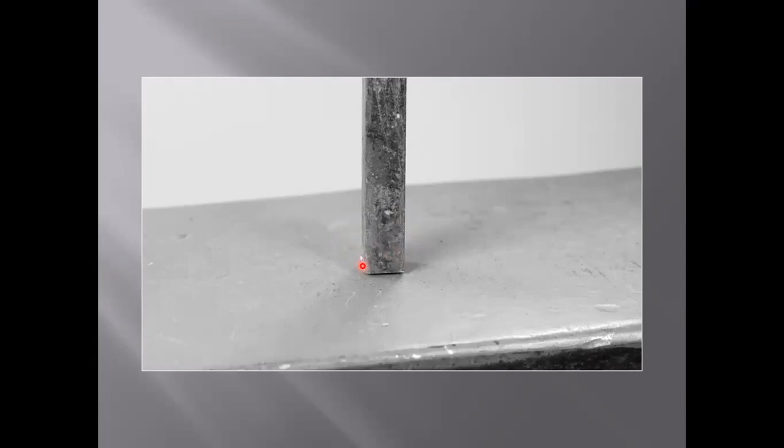We're going to take a 3/8 square bar, heated back no more than 3/4 of an inch to thicken this by upsetting it. So to get that short heat, that's the only time you can dip your piece down into your coal forge and get that nice short heat.

Place the heated side on the anvil, and you're going to hit from up here to fatten that end up. Now, as you do that, it's going to bend. And if you don't immediately correct the bend, it's going to bend more. And we want a straight piece when you're done.

So make sure that you straighten that as you upset it. It might take more than one heat. That's okay. Just keep that heat localized to that inch, 3/4 of an inch, and thicken it all the way around. I like to turn this every time I hit it, and I think that helps me keep a more even upset. And then once you're happy with the thickness, start angling the piece towards your hammer hand, in this case towards right-handed hammering, and start to put your taper on there.

I told you I was going to tell you a couple ways to get that. Might as well just get that taper started right here. Now all you need to do is bring this side back to parent stock width, and then continue to narrow that toe so that you can get started on your scarf.

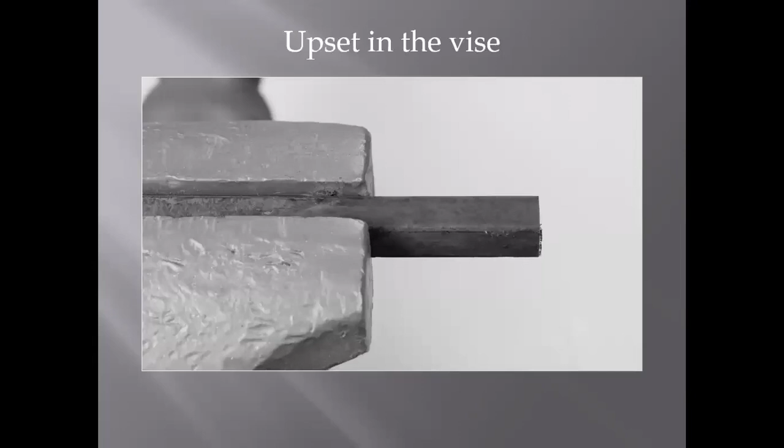If you don't want to upset it at the anvil, you can upset it at the vise, but you're going to need to think ahead as you hit this here to upset it, and it still should be a short heat. It's not as concerning because you're going to put it in this heat sink called the post vise, but a short heat is still warranted.

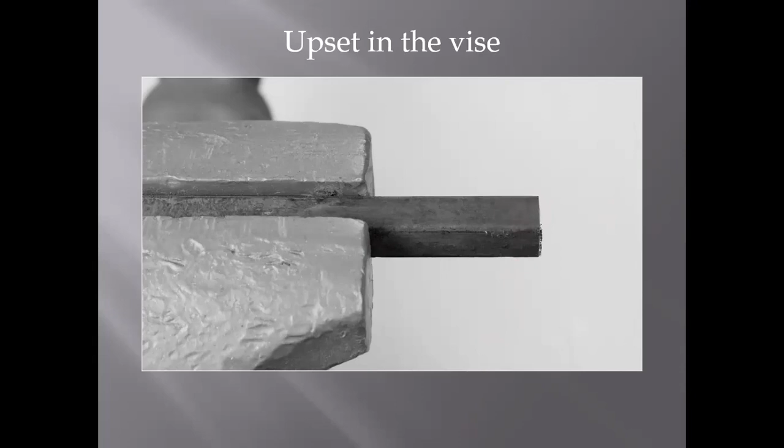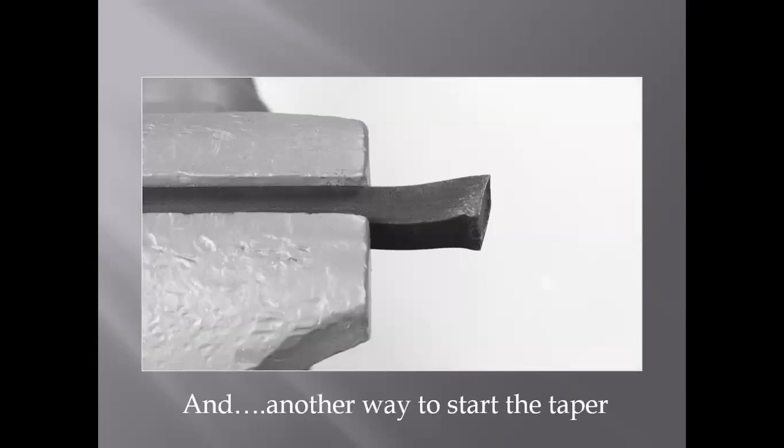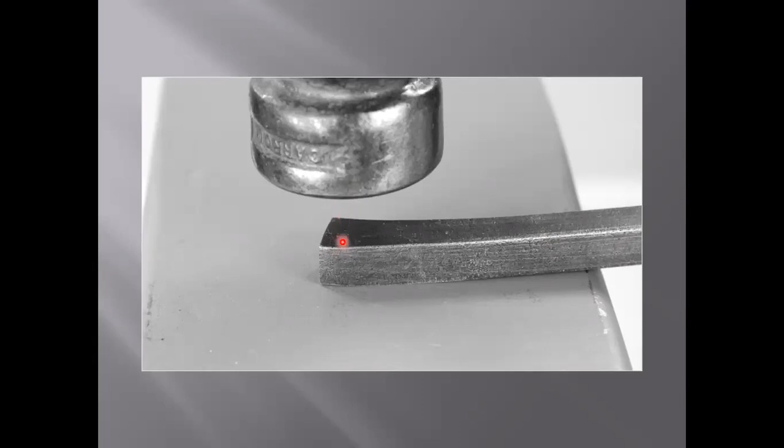You're going to hit here, and as you hit here, this is going to pull towards you. So start with it bent away, and then as you hit it, it'll straighten out, it'll upset, and then if you angle your hammer blows a bit, you can again get that taper started with a couple of angled hammer blows. Bring that piece back to its parent stock width, which will also give you a little extra material long-wise here, which will ultimately be your top and bottom. And a little extra material there is going to be helpful when you get to blending this weld in place.

You're ready to taper in your toe, make your 3-sided taper, set your indices. And again, this taper is too steep right now, but don't worry about that. You're going to hit it right on top. Notice how it's lining up with this apex here over a rounded edge so as to not make a shearing plane. Hit it on top, follow this down, drop this hand, allow this curve to happen, and you'll end up with an appropriate shallowness to your taper.

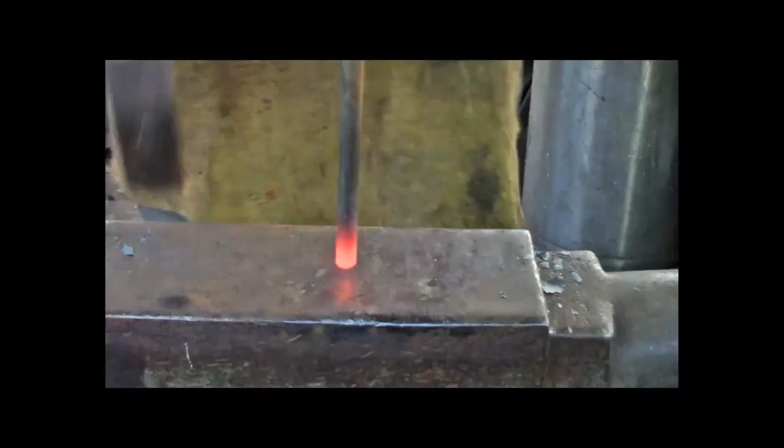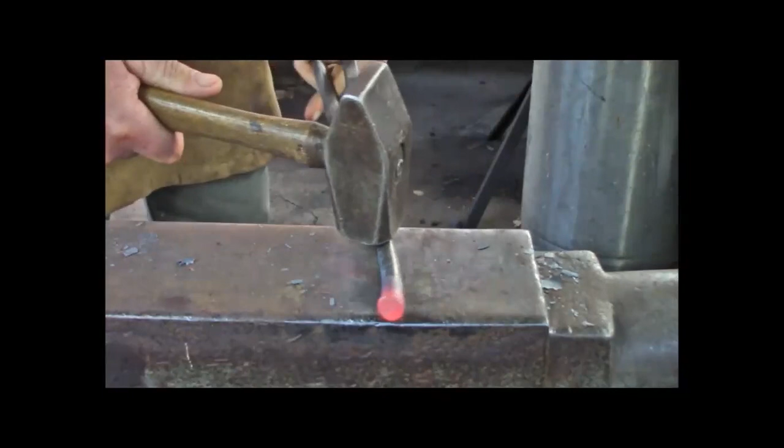So let's watch that happen. Bringing it up off the anvil does preserve the heat. And once you're happy with the thickness, angle that, bring it back to parent stock width on both sides.

And now you can bring in those toes, set your indices. You've seen it. It can happen on the edge of the anvil or on a block. And then follow that taper down to make sure it is a pretty shallow angle. You might need to knock in those sides, because remember, we're trying to check that so that when we hit it, it doesn't grow out past the one on the bottom. So there you are. You got your little scarf all ready to go.

Now I'm ready to teach you juggling, because really that's all a drop tong weld is. We're moving a little out of our comfort zone here of forge welding when everything's all nice and tidy together. But instead, we got to line everything up and get it all positioned in time to hit it, in time to weld it. So how do we do that?

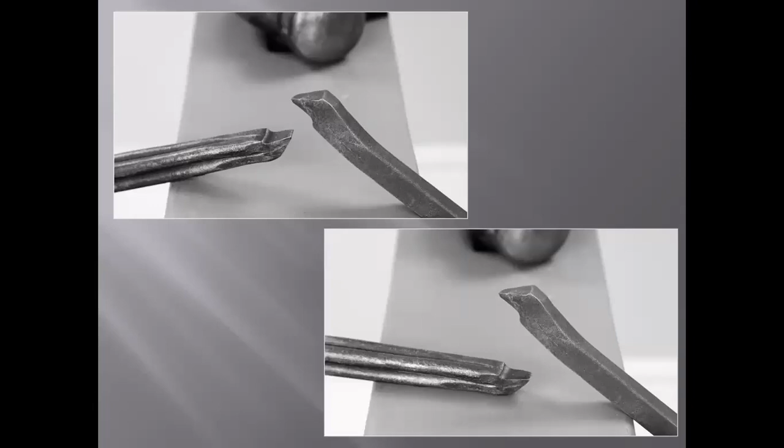Both pieces are yellow hot. They've been brushed, fluxed, and reheated. Note that the hammer is ready to go. It's sitting here ready for the smith to grab that easily. And it's even facing the direction that they want it to be.

The hammer hand is holding on to the short piece and it's reaching over the anvil with the tongs and anchoring that on the side of the anvil.

I've seen people try to line these up just in the air, and it's pretty much impossible. You waste a lot of time fiddling around trying to get those to match up. So anchoring them gives you a stable fulcrum to first set this piece down, and you still got your tongs over here.

This is your hammer hand over here. Then you've got your material held, your long shaft in your material hand anchored here. You're now able to line that up right so that those two indices match up. The better this fit, the sooner you're welding.

If this didn't fit well, your first blow or two is going to be getting those lined up. And when we're forge welding, seconds count. So this might be the other secret of forge welding: having a good fit saves you time and will get you welding faster.

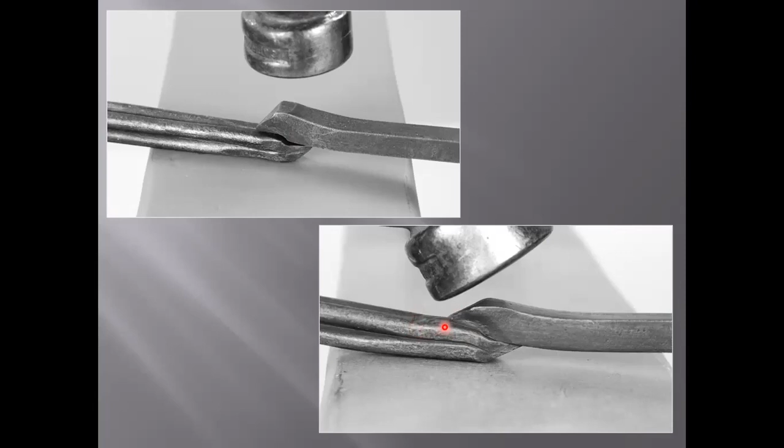So we've got all our pieces positioned, hit on top. You should see some debris and other nonsense. Drive the flux on out of the middle of that. And then you're going to angle your hammer, follow and blend in this toe. You can already see some hammer blows impacting the width of this, possibly.

So that's why it's good to start thicker, or thicken it like we did with this shaft. If you still have welding heat and everything still looks wet, the crust is not encroaching on your welding area, you can turn it over.

Notice that the basket handle is now on top. Same maneuver, hit on top, but spend most of your time blending in this toe. As soon as this gets crusty, you need to stop and reheat it. Don't even try to start forging this.

Notice that this hammer blow was such that the weld took place at the atomic level down here, a gentle introduction, and your scarves are pretty much intact at this point. That's how it should look when you first stick this.

Now, sometimes when you get started doing this, this might have bent out to the side and be a little crooked. Don't worry about that either. If you can get your weld to stick, you can forge it straight again.

So I find that I have to heat it at least 3 times before I'm brave enough to start forging. But once your weld is stuck, brush it, flux it, right back in the fire, back up to welding temperature, re-stick it both sides, brush it, flux it, right back in the fire, and then you can start forging.

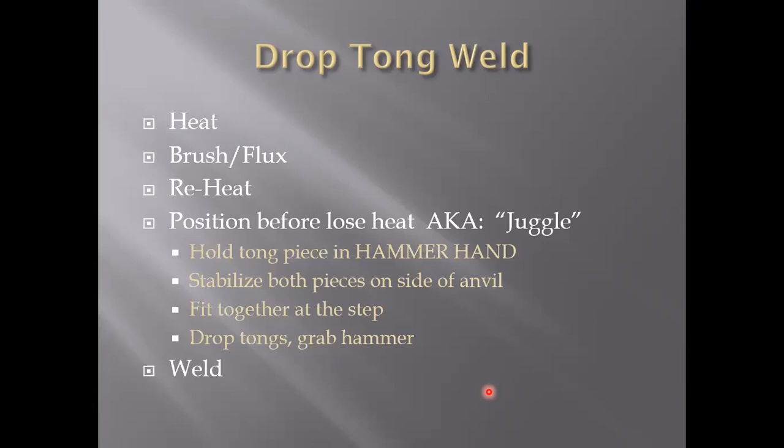As I said before, this is only going to cause something else to go wrong. Something's going to fall on the floor, or your piece is going to fall on the floor. I have picked up a piece off the floor while it was still welding temperature and welded it, but I don't recommend that as general practice. So practice this cold. If you practice cold, you'll notice how well your pieces are fitting up, and you can correct that before you go to weld. It'll give you confidence in your new juggling act, and you'll be able to move calmly and confidently, saving the time you need to perform this maneuver.

So let's watch a little video of that.

Hammer hand has the tongs on the far side of the anvil. Line that up on the bottom, using the anvil as a fulcrum. Place that on top, hit the top, follow that toe down, turn it over. We still got a great welding heat here. Most of the time is spent trying to blend in that toe. As soon as that crust forms, reheat it and then continue on with your blending welding.

Make sure you can see Mark here going for his brush. You want to brush this thoroughly at this point, because that flux can leave a little hard scale on there that'll be annoying to get off later.

Note here, this is just a still of what we just watched, that both pieces are super wet looking. They're the same color. That's how you want it to look. The cooler areas are where you're seeing this crust form. That's your marker. As soon as that crust comes up here, stop what you're doing and reheat.

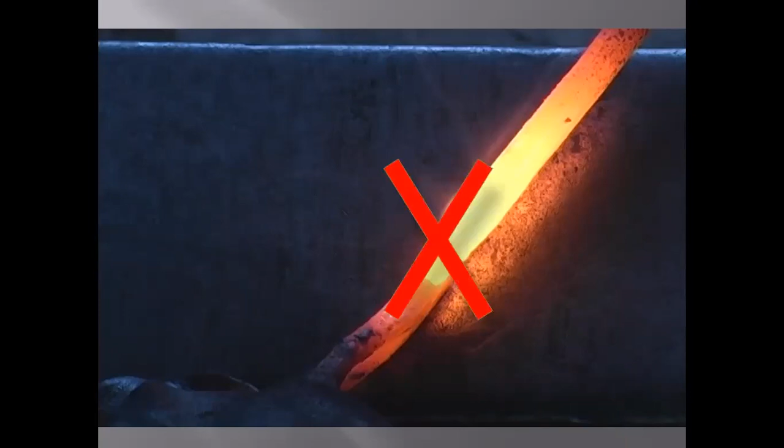This weld actually stuck, but then fell apart. You can see right here, this is not the same temperature as this. They both look a little wet, but they're not the same temperature. That is not going to stick. So make sure both pieces are heated the same color and the same wetness. And it's a nice long heat too, so you have time for this to cool.

You might end up seeing this too, where the part that was subjected to this heat sink we call an anvil got a little cold, but everything else around it is still welding temperature. Just give that a second, but you could still be welding this bit that is the right temperature.

So all of this was done on a coal forge. Let's look at an option for a propane forge. In a propane forge, scale is your enemy, time is your enemy, even if you use flux. So an option is to rivet it together

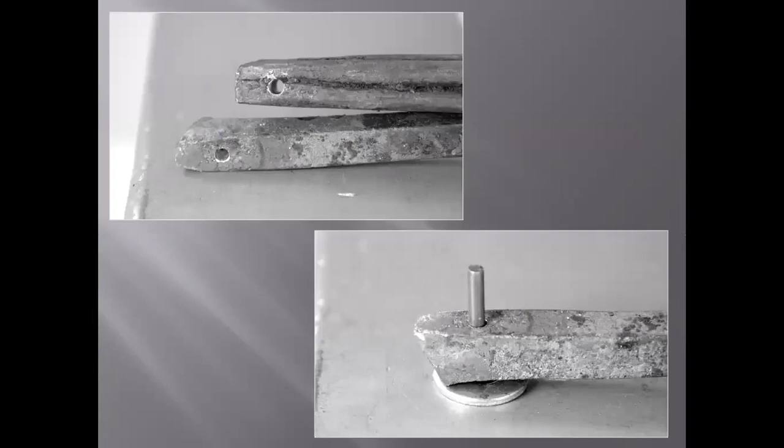and get it positioned together so that you're not having to do the juggling. Now, if you're having trouble juggling, this is also an option for you. There's no problem in doing this, it's just going to take a little more time. You got to drill the holes and set the rivet. Notice that there's no indices because there's no reason we're going to be lining anything up. We're going to be riveting them together. The washer leaves a little stick out on the other side so that you can rivet that other side.

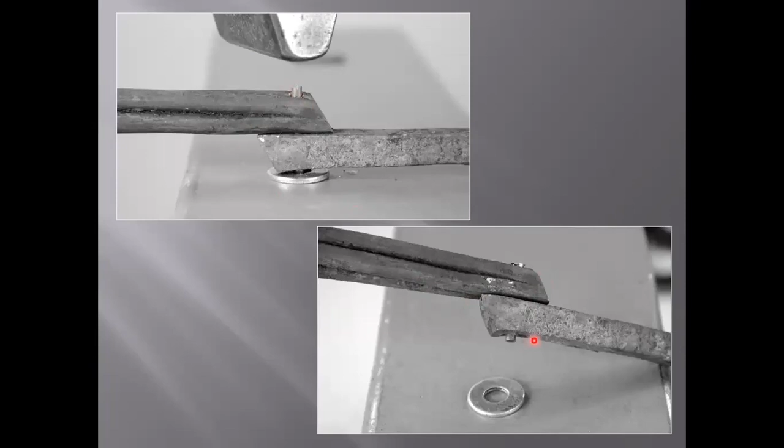So just rivet over this edge, turn it over, rivet over the other edge, and then heat this up to welding temperature. Same steps though: brush, flux, weld, brush, flux, reheat, weld, and then blend in your piece. So let's watch that happen here.

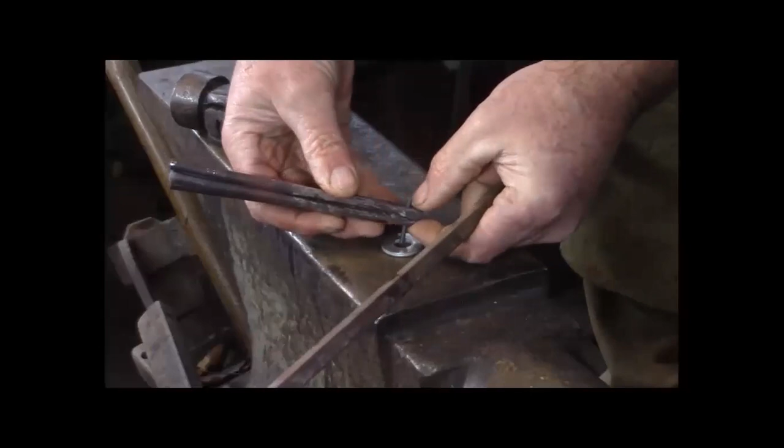So just setting in the rivet, nothing fancy. Turn it around, keep everything in nice alignment, set that rivet on the other side. Notice this is cold, all done cold. It's a 1/8 inch rivet size here, so cold is fine. It'll head over easily. Then it's just a matter of welding per usual, making sure everything is at a welding heat as you work. Brush off all that extra scale, reheat when you lose your heat, and finish off your taper.

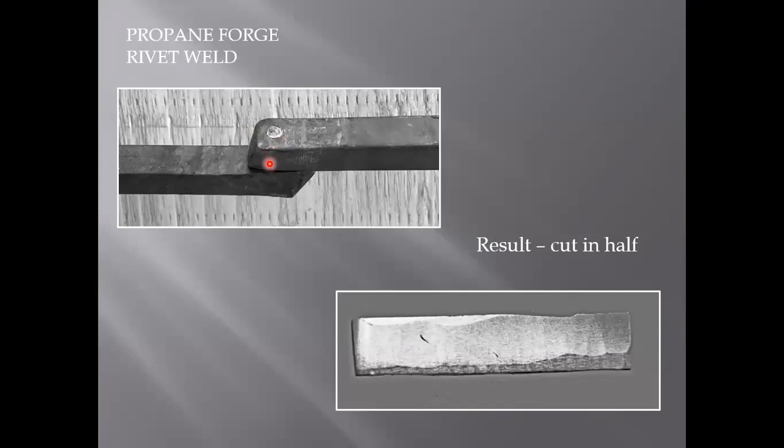So I thought it might be fun, and I'd recommend you do this too. What does that look like? Can you tell anything about the rivet? I tried this in a propane forge, which I don't use a lot. I use coal as my mainstay, and now my induction forge, now that I have one.

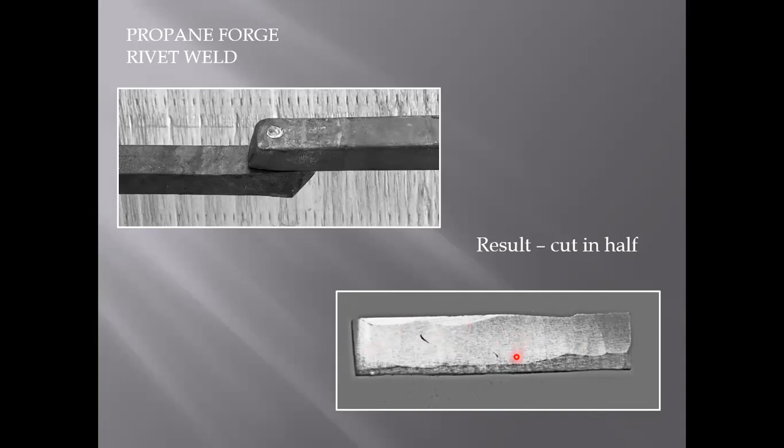I cut it in half after I welded it, and that's a strong weld. I also tried it with a tack weld just for fun. There was some discussion in my last coaching group about whether or not this was a viable option, and it turns out, in my experiment anyway, that it is.

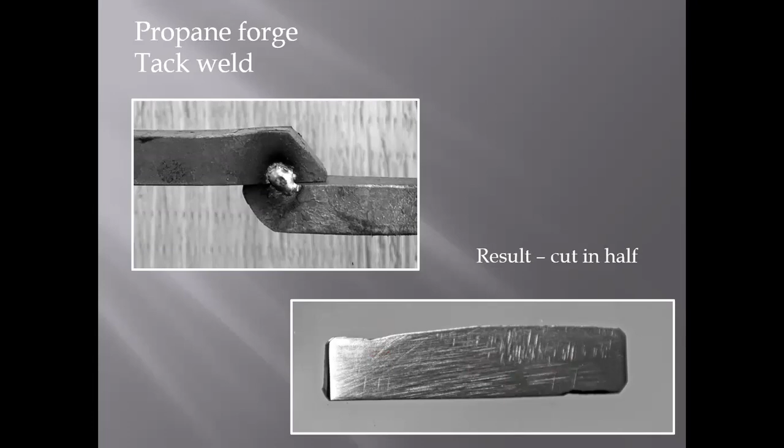I would recommend as small as possible, and don't cover up this toe. I still want anything that might have gotten underneath this weld to ride that flux debris train on out of there when I'm first welding. You can see here's the edges of my weld - again, that is a nice solid weld. Then I had to try it again in my induction forge with very similar results.

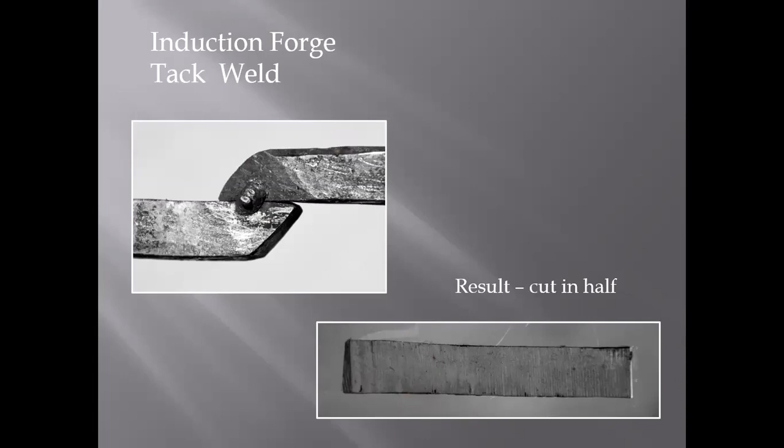This was a fun experiment with the added benefit of seeing how much scale each of these heating modes produced. The propane had the most - maybe somebody more accustomed to the propane forge can fine tune that so they don't get as much scale as I did, but it was falling off in big chunks. The coal forge was about what I expect, as that's what I'm used to. The induction forge was just a little finer, but kind of the same amount.

So you are going to lose some to scale, which makes a case again for thickening up that piece before you start to weld them together. But I digress, although I do encourage everyone to do your own experiment.

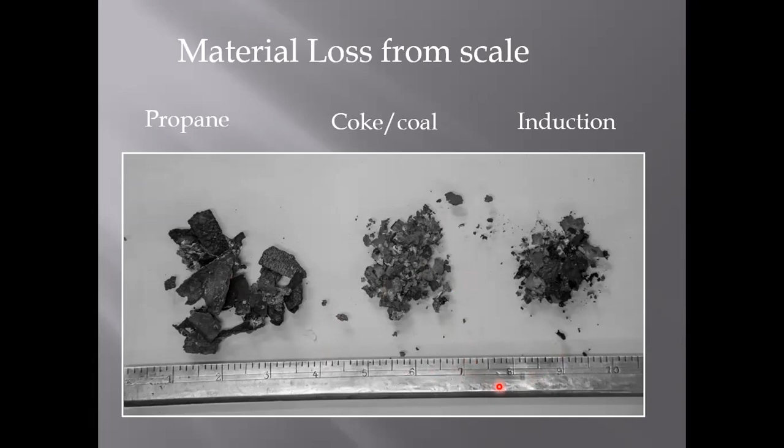We're ready to turn our piece around. We have a long shaft on the end of our basket handle to be, and we're going to put a collar on the end of that basket. Again, in a propane forge, a collar might not be an option for you - you could do a shepherd's hook instead, and I'll show a video on that option, or maybe you just like that aesthetic better. You could do that as well.

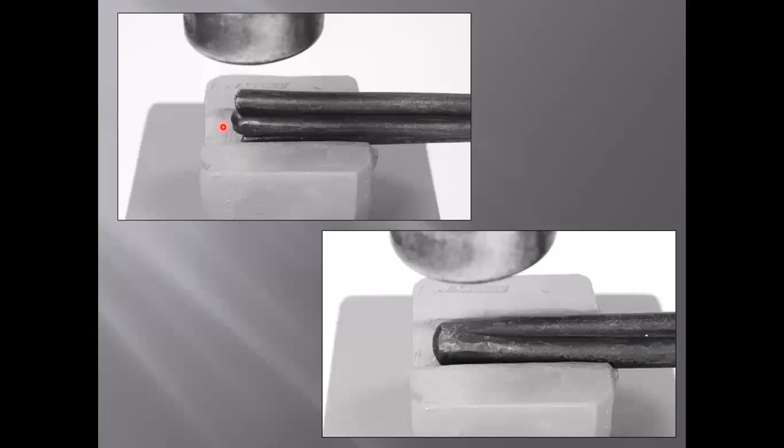We're going to initiate this weld the same way we did the other side, only it's going to be a really short weld. That collar, we're going to be using a 3/8 inch square piece for that, so I need a 1/8 of an inch to stick out plus my 3/8 of an inch for my weld. So I don't need much of this welded, about a 1/2 inch.

I want to turn it round as soon as possible - you're going to hit it on the top again like we did. It's a bit of a diamond, but then just take it right to round. If you have a half round bottom swage, 3/4 inch is best so we don't make this too small. It helps get that rounding happening on all sides, or you can just do this on the anvil - it's nice to have, not a must have. But do not overforge this. We want to keep that a proud 1/2 inch at this point, so don't overforge that weld.

We're now ready to prepare our collar for the weld. We're going to use a 3/8 square bar. To make a collar, like any collar, you need to know exactly how long that collar needs to be, and you also need to understand how that metal's going to act when we turn it.

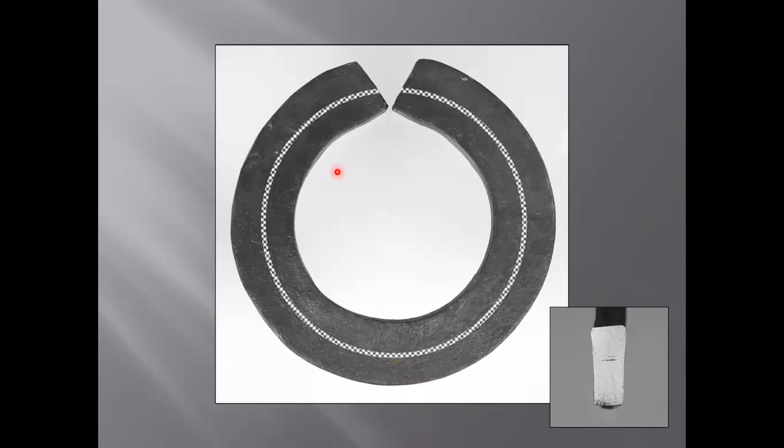So that involves knowing how this metal is going to act, and some math - you can do a little bit of math. First, as just an experiment, if we take a bar and make it into a circle, you're going to notice a couple things. The first is that this inside had a shorter distance to travel.

It has to go somewhere. That metal, it's the same amount of metal all throughout. It has to go somewhere, so it's going to get thicker. This is that inside edge, and it's going to get longer. It's going to stretch, it has to go somewhere. This outside has a longer distance to travel, so it's going to get thin and it's going to retract this edge, and you're going to end up with this V.

So we have to take our straight bar and prep it a little. No prep, you get the V. But if I take the inside edge and make it smaller, and take the outside edge and make it longer, when I wrap this around, those edges are going to line up nicely.

At this point, this is a different distance. When I round it, this edge is going to end up a different length than this edge. So the middle is the only measurement that stays the same when you make metal round. So that neutral axis becomes

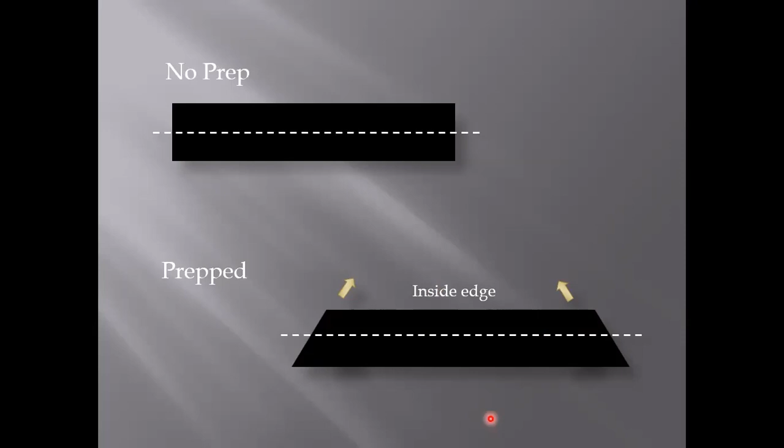So when we do our measuring or our formula for figuring out this length, which is essentially the circumference of this circle, we need to measure from the middle. So our circumference is pi times diameter. We know our diameter to be 1/2 in the middle plus half of a 3/8 bar, which 2 halves make a whole, so 3/8. And that gets us a diameter of 7/8 of an inch. Pi, we all know, is 3.14, blah blah blah blah blah, right?

But we're not machinists, we're blacksmiths, so I'm just going to take that by 3, keep it simple. We got 21/8, which breaks down into 2 and 5/8. So my middle to my middle needs to be 2 and 5/8 to get a collar that'll wrap around that 1/2 inch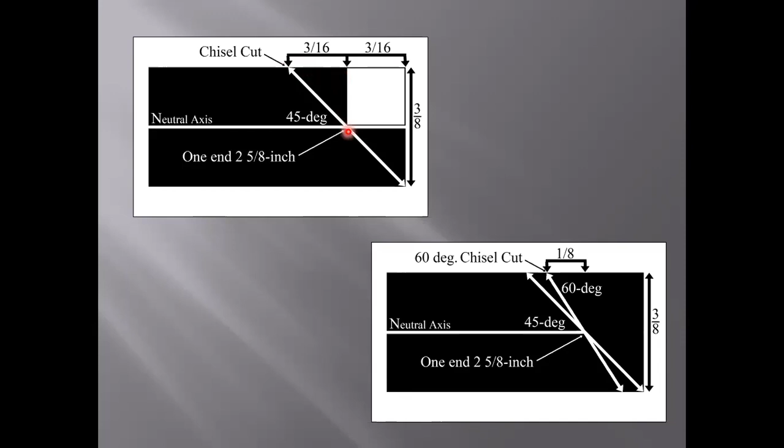That square is going to be half my 3/8, 3/16. So I need to take away 3/16 on both sides. But again, blacksmith, not a machinist, and my guess is that 45-degree angle won't really be 45 degrees, it'll be more like 60 degrees. So let's get rid of a 16th and just call it an 1/8. So let's take away an 1/8 from each side. So those top edges need to be 2 3/8, and that gets me 2 5/8 along the neutral axis.

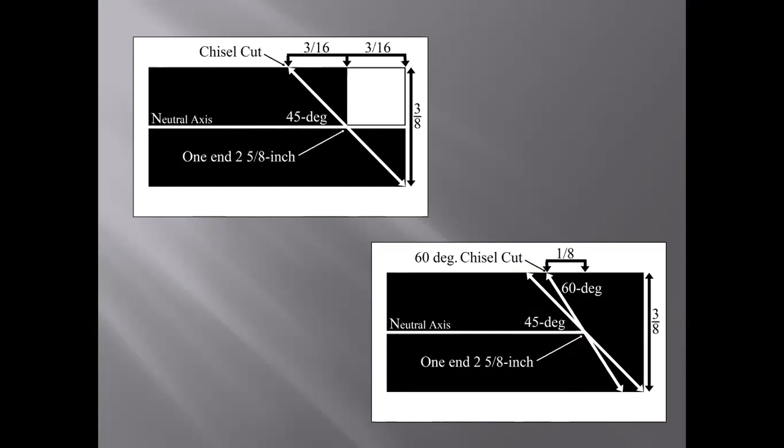So we're going to start by just cutting off at an angle the edge of this. And remember, we're going to keep this long bar going, and I'm going to make a mark. I'm not going to cut this, I'm not going to make a deep divot, I'm just going to mark this at my 2 3/8. One, two, three. But I want to show you another option for measuring.

If you have 3 hands and you can hold the ruler up here and the chisel and hit it all at the same time, this might not be problematic for you, but it's problematic for me. So I'll have another little way of looking at this.

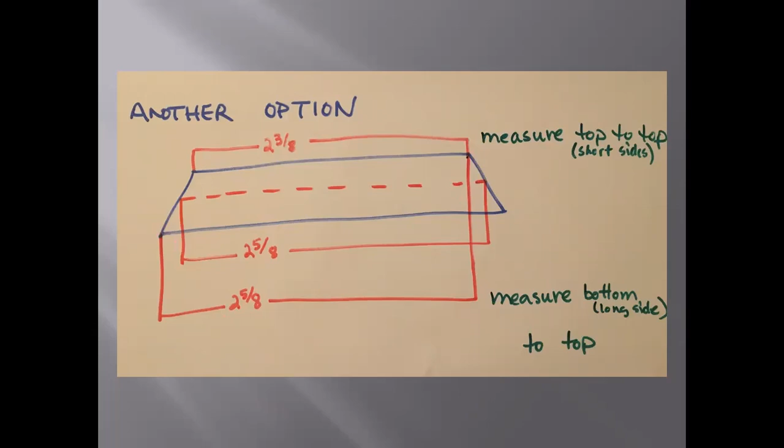I've got my neutral axis right here. What if I take this whole box and just move it all over so it lands here? On my long side, I can still use my original measurement of 2 5/8 because I've just taken this line and moved it to here. Hopefully everybody's following that. Now I can set everything on the anvil. I like using a little hook rule flat on the anvil. I can snug this up against it, and mark back to my 2 5/8, marking my short side and my long side to what will ultimately be the same length as that neutral axis.

This hook rule is just a stainless steel carpenter square that I cut down to 1 inch on that narrow side. It's getting a little worse for wear here, but make sure if you get a carpenter square that it says stainless on it. I bought one and wasn't careful about that, and a very weird smoke came off of it. I'm assuming it was some kind of galvanizing. Don't do that. That's not good for you.

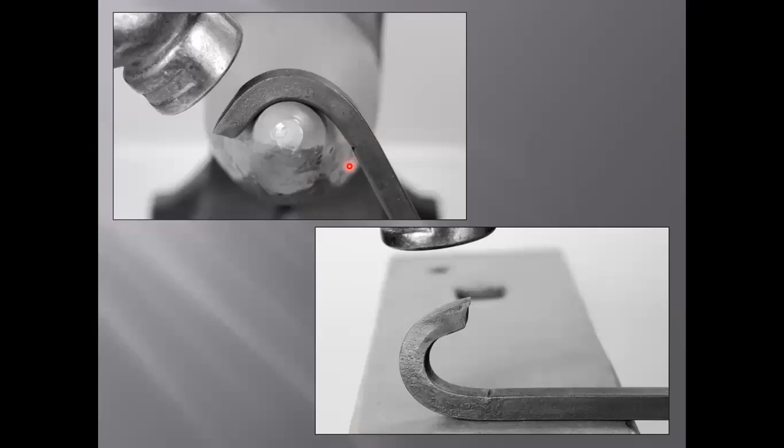All right, so now we've got a mark in place, and we're doing nothing more than marking it at this point. Remember, your short side is your inside. So with the mark down, see the little mark here? We're going to start bending this around the horn, or whatever you have to start moving that around.

This isn't forging. There shouldn't be any dings on this. You're always hitting over air. Don't hit it over the anvil. You're not forging, hit it over air to bend it. The hammer blows are always going to come at the same spot, and the only way to do that is to drop this material hand lower, lower, lower as you bend this around.

I see people starting out straight, right? And then they chase this around till they're practically upside down underneath this, trying to hammer up. Just drop your material hand and that bend will just form around, and you can keep hitting in the same spot.

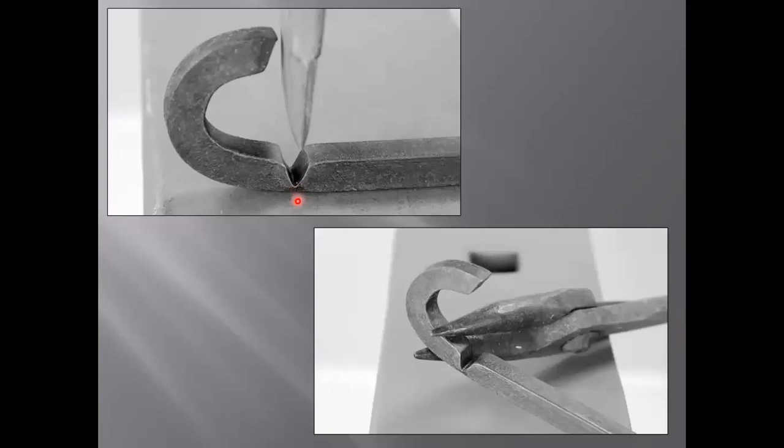What you want to do is bring this over the top of your mark, because now I'm going to continue to cut that through, not all the way. I want to get everything hot. I want my basket handle, this all heated. I want to sever this at the very last minute. So cut this to within a thread of its life here.

Now you can heat this whole thing, holding onto that nice long bar instead of fishing around for this tiny little piece. If you're using a propane forge, I suppose you wouldn't have to fish for it, but then we've already talked about how that might not be the best way to weld something. So keep it on the long bar so you can stick it all in the forge and get it hot.

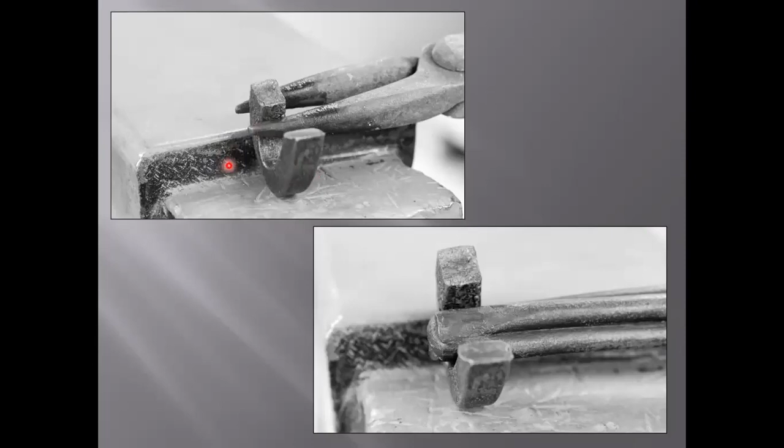Then when it's hot and your basket handle's hot and ready to go, you just wiggle that bit off with some scrolling tongs, or some tongs that won't mar your piece, and set it on the step. You're going to want this backing here. Place your hot basket handle in the middle and you're going to clamp this around the basket handle by smacking this right here.

Once that's clamped all the way around, you're not welding, you're just clamping this to the basket handle. We got our 1/8 stick out so that we can blend that in nicely when we're ready, and leave a little gap here. A little gap is better than no gap, because no gap gets you a ring, and a ring is not what we want. We want this to weld to the basket handle and then weld to itself.

Let's watch all that happen. We're going to start by just starting our angle or our taper at the one end, and we are going to cut this all the way off. Make sure everything stays in check with the parent bar.

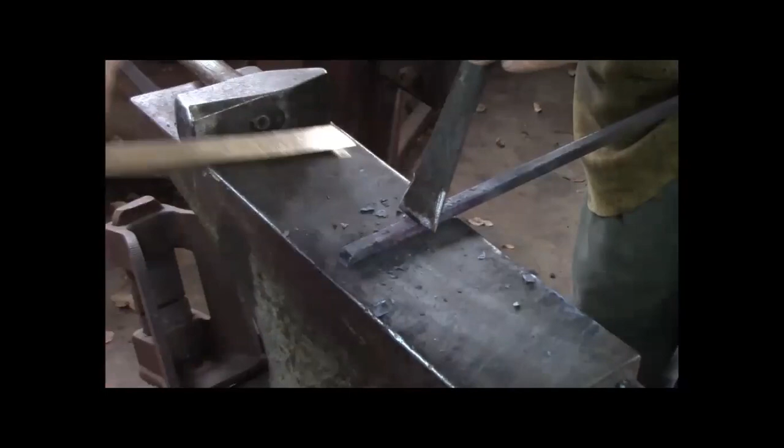Now, see, Mark can do all of this at the same time. We're going to make a mark on the top. He went 2 3/8, and we're going to bend this around. Notice how this material hand drops, so his hammer doesn't have to follow that bend around.

Bring this so that it's almost severed from the bar, and you can see a little space underneath there still to let you know that you're not quite to the bottom.

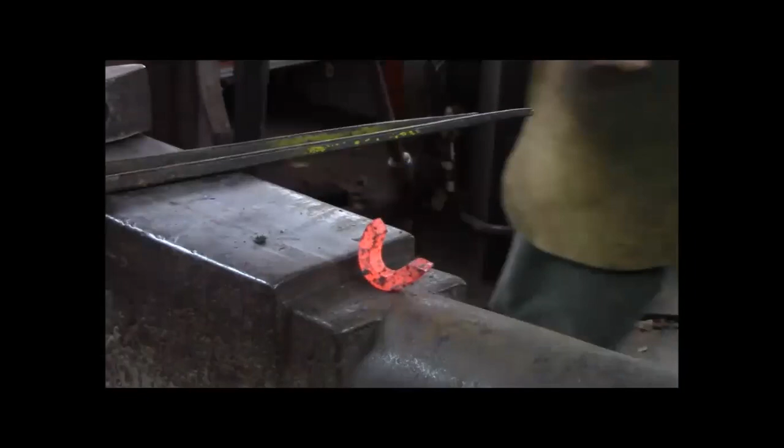Now we're going to get everything hot. We're heating up our collar and just clamping it to the basket handle. It's not welding temperature, but we really want our basket handle hot, or we won't be able to get it hot enough to weld later. So that really needs to be nice and hot.

Clamp that around, leaving a little gap at the seam, or what will become the seam. Cinch that all up nice and tight. And now we are ready to weld this.

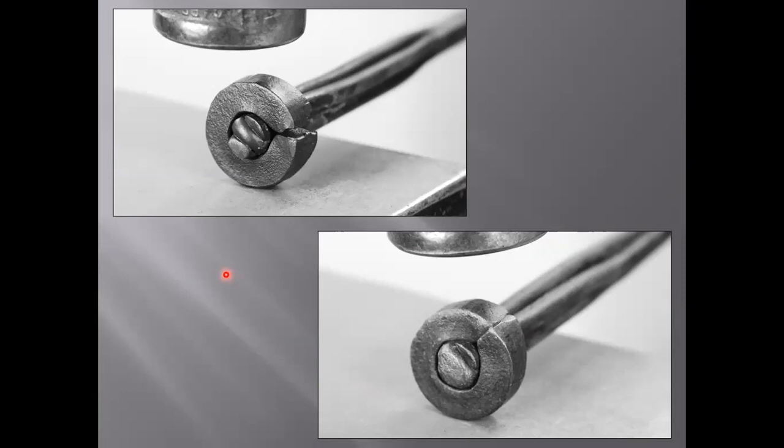So to weld, same MO here: heat, flux, heat, and weld. Hit it on top. The gap should be at either 3 o'clock or 9 o'clock. Hit it on top, turn the gap towards the top, hit it again towards the top till it ends up at 12 o'clock, essentially hitting it 3 times, bang, bang, bang, each time bringing that seam up towards 12 o'clock.

And then you could turn it the other way, same thing, hit it on top, bring that seam up towards 12 o'clock, hit it again. And that should get it welded to the handle and to itself.

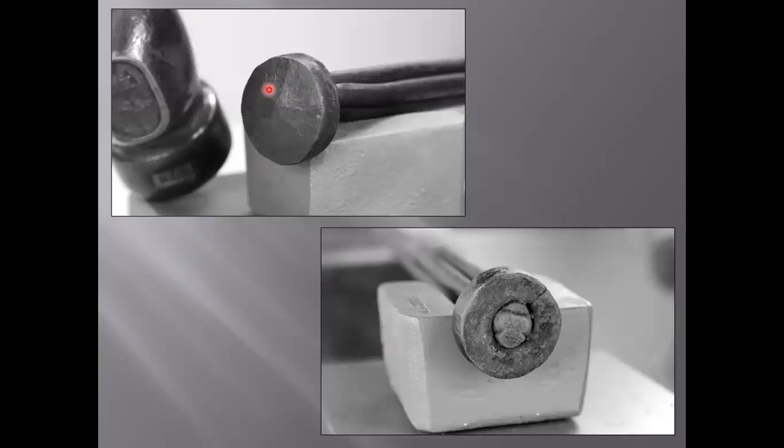It can be done on the anvil. If you have a 1.5 inch round swage or hardy swage, it will make it a little easier going, as it'll keep this nice and round as you're beating on it. Our goal is to end up with an end that's nice and smooth like this.

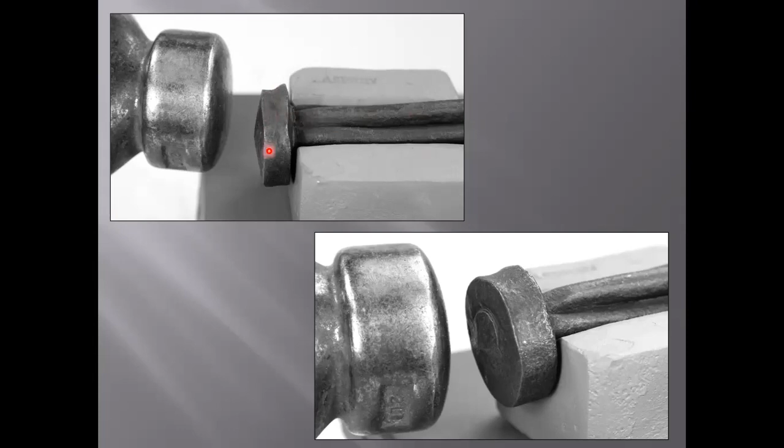So now, at welding temperature, you're going to hit and blend in that little 1/8 inch stick out to remove all the seam that you see here. When you do this, you're going to hold the handle flat in the swage, and your hammer is going to be horizontal, angled. Make sure that the center line of your hammer doesn't get above the top of the swage.

If you do that, this is just going to rock this back and forth. You want to hit it where this is secured to either your block or the side of your anvil, which it can be done either way. It's a little easier here. It keeps some of this from jumping around too much, although this will bend - the handle part will bend as you go. Just keep it straight and continue blending.

Sometimes turning it back and forth keeps this from twisting or buckling up too much. Just continue to work this around till you have the surface that you want. And then you can put in facets or whatever you want here.

I've also tried this with a larger bar, 3/8 by 3/4, and that does make a nice thicker collar on there. So experiment again, try different options to see what you like.

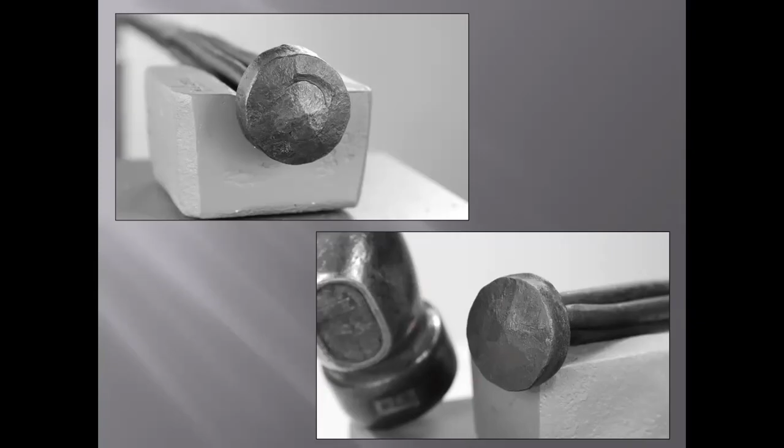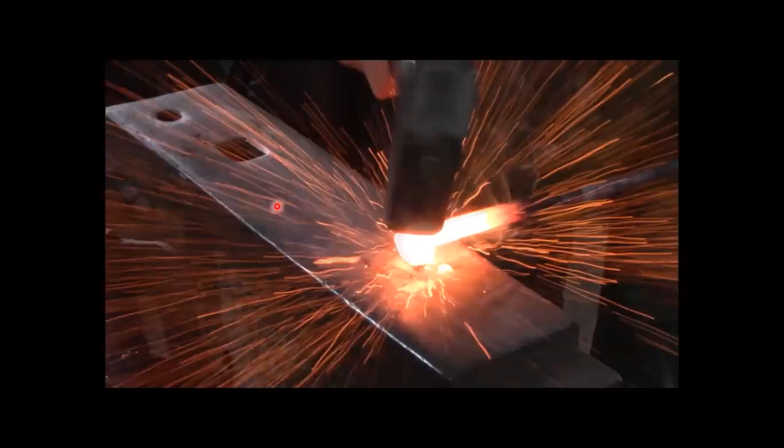Notice this is at 3 o'clock to the smith, 9 o'clock to us. Hit it on top. That debris riding that flux wave out. Now it's turned 9 o'clock to the smith, 3 o'clock to us - that's the seam. Hit it on top. Turn that, follow it up, and then just keep turning it around till it's all nice and welded.

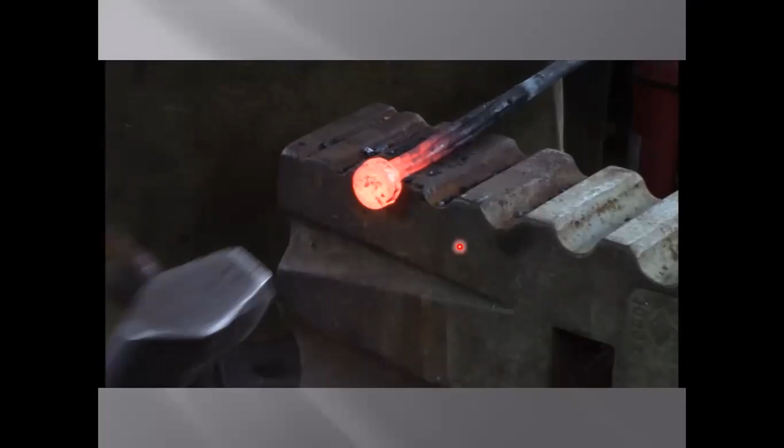It's always faster to go over two fullered surfaces, so using the horn is helpful. And then this is nothing more than a round taper, curl around the edge, and then make your hook.

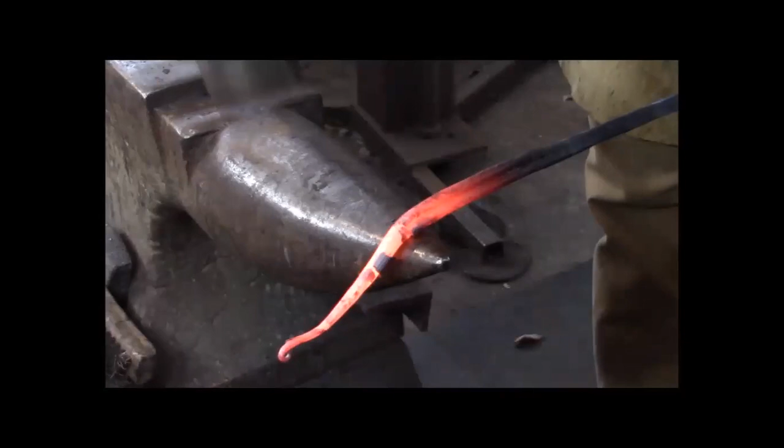So this is an option if you prefer that aesthetic, or if you have a propane forge and you're not sure that that collar welding will work, or you tried it and it didn't work. So there you go - stay tuned for the final part of the project.